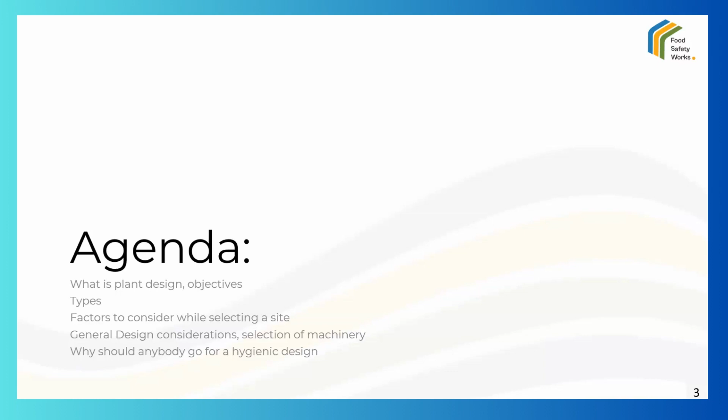And a little bit on general design considerations and basic factors you have to consider while selecting a type of machinery. And then we'll come to a conclusion on why everybody should go for a hygienic design. So these are the basic agenda points for today's session. First, we'll check what is a plant design.

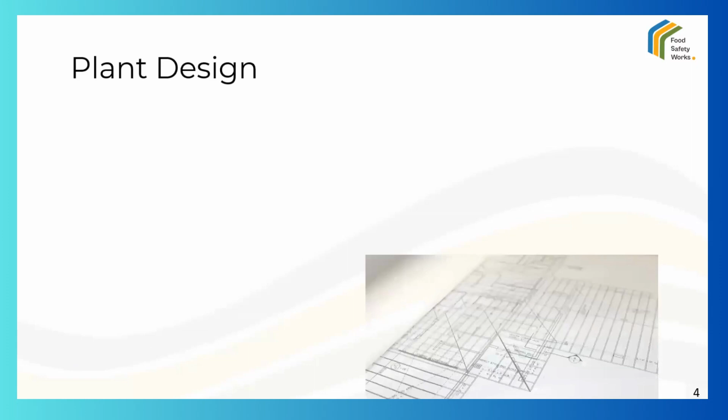Food plant design is basically a sequential and optimal arrangement of process, machinery, and movement of people. It refers both to the physical facility, that is your building and your supporting facilities, and to the enclosed process equipment, because in reality these cannot be easily separated. Unlike many other manufacturing situations in which the building is merely an enclosure for the equipment and the process, a food plant can be an integral part of the process and contributes significantly to its success or failure.

A food process design determines how the intended products in a plant are actually made. From this flow, the material and people patterns, utility requirements, environmental conditions, and all other requirements have to be determined in a facility design. So basically a plant design gives the space requirement for the facilities and their proper allocation.

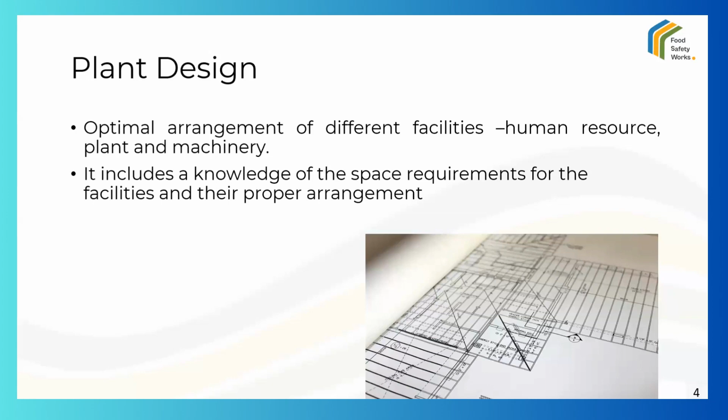Now, why do people spend so much effort on a plant layout? Let's quickly review some of the top reasons why people opt for a plant design in food business operations. Basically, it helps in overall simplification of your production process in terms of equipment utilization, minimizing delays in the process, reducing manufacturing time, and better provision for maintenance. Overall integration of man, material, machinery, supporting activities, and other considerations in a way that results in the best compromise. That is a major objective or advantage of having a plant design.

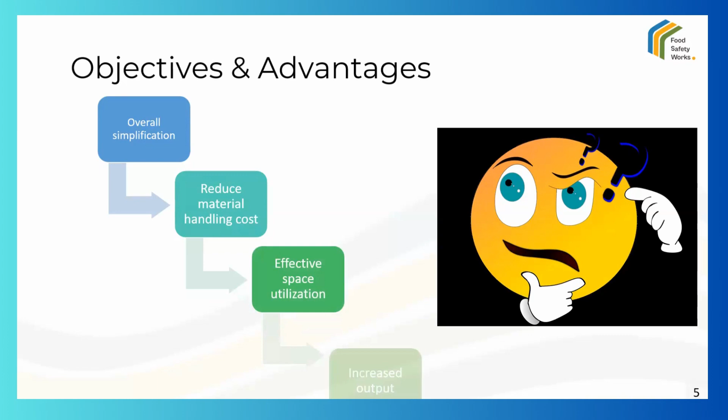And it helps in minimization of material handling by suitably placing the facilities in the best flow sequence, saving floor space, effective space utilization, and less congestion and confusion. It increases the output and reduces in-process inventories. Then it helps in better supervision and control.

It gives worker confidence, better convenience and better worker satisfaction, a better working environment, safety of the employees and reduced hazards, minimization of waste and higher productivity, avoiding unnecessary capital investments, and thereby higher flexibility and adaptability to changing conditions.

So in other words, you can say a good plant layout is specialized to what your business needs by achieving the goals of your operation and optimizing every possible parameter. So these are the general objectives and advantages of having a good plant hygienic design.

Now we'll talk a little bit about the types of plant design. Basically, you have a product or line layout, a process or function layout, a cellular or group layout, and a fixed position layout. Now, product or line layout: in this type of layout, only one type of product is produced in that particular given area or specified defined areas. The work centers are organized in the sequence of their appearance.

The raw material enters from one end of the line and goes from one operation to another rapidly with minimum work-in-progress storage and material handling. In this type of product layout, the equipment is arranged in the order of their appearance in the production process. So if you have a product layout, the advantages are reduction in material handling, less work in process, better utilization and specialization of your labor or workforce, reduced congestion and a smooth flow. It also gives effective and efficient supervision and control.

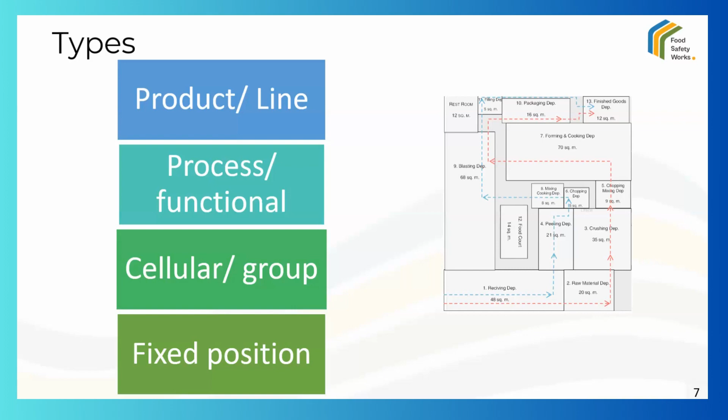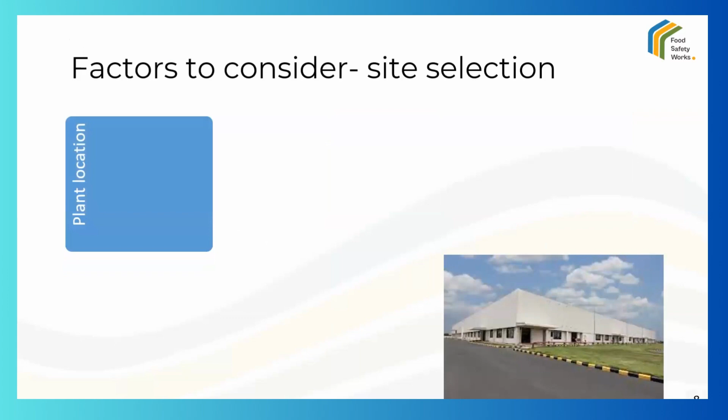So these are the general types of layout. In general, the food industry is mostly based on the product and the process layouts in general applications. Now, for a food establishment, we'll see what has to be considered when you go for a site selection. As per FSSAI, a food establishment has to be located away from potential sources of environmental contamination like objectionable odors, chemical pollutants or smoke, or anything which poses a serious threat to food safety. And you should define your boundaries. The site boundaries need to be clearly identified with access control.

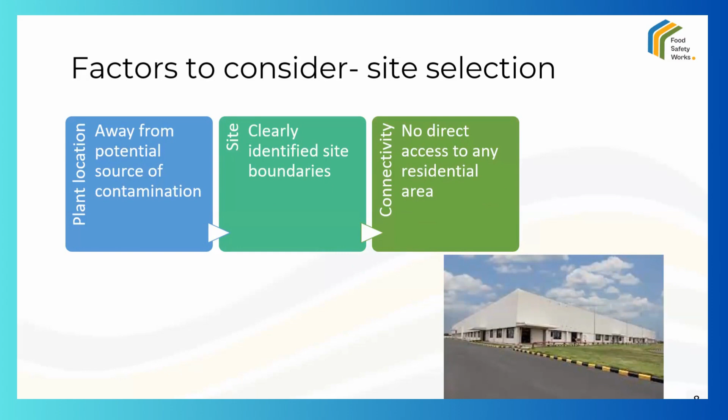The surrounding areas of the establishment have to be kept clean, maintained in good order, and adequately drained to minimize potential contamination from pests, water, debris, etc. The manufacturing facility shall not be directly accessible to a residential area. That is a requirement from FSSAI. Now, in certain cases, you cannot achieve that. In that case, sufficient measures have to be demonstrated to show that it is not posing any threat to food safety.

So once the plant size and capacity are decided, you will have to identify the process of making that particular product. Is my product going to be frozen by the IQF method, individual quick freezing, or a blast freezing method? That has to be identified.

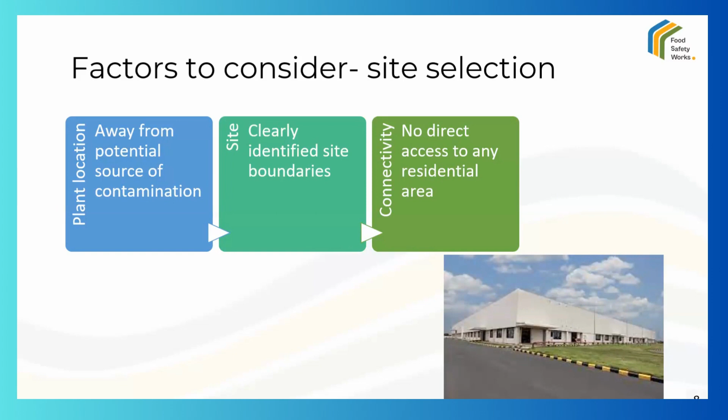Then comes your equipment selection and its capacity. You will have to do market studies, various designs, then come your utilities to support your services and your products, like your water supply, proper lighting, maintenance, and cleaning requirements. All of these come into the picture.

Once you have all of these identified, you have to consider the basics of design. That is, you need to have a segregated route or flow for people, raw material, packing material, finished products, and your in-progress material based on the process you have. It shouldn't possess any mode of cross contamination.

It is very important to ensure that there is a right flow of people and material inside the facilities, from the receipt of the material till the material gets dispatched. Is my flow causing any cross contamination or not? That has to be identified.

For example, generally for food handlers or staff who work in the food industry, you need to provide an adequate number of washroom facilities. Now, if the washroom facility opens directly into the production hall, there is a high chance of cross contamination. The airflow rate, people using the washroom without any change of PPE, all of these will affect the safety of the final product, however much we try to make the product safe.

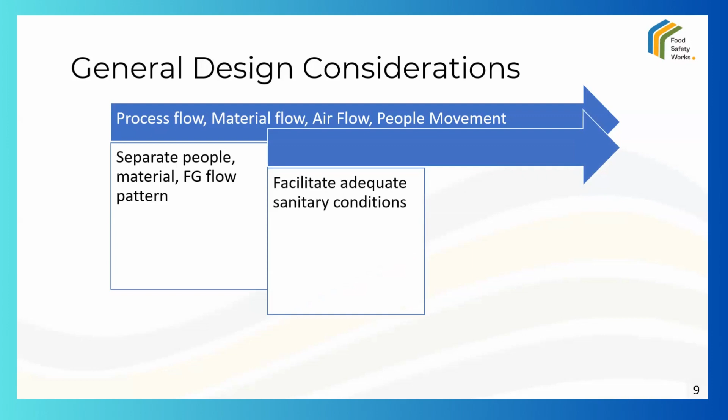So FSSAI says that there should be an adequate number of washroom facilities, but also says the food handling areas and the movement pattern of materials, products, and people shall protect against potential cross contamination between and during the operations of foodstuffs. That is a requirement which FSSAI states. Basically, your sanitary conditions and airflow rate have to be taken into consideration. You will have to focus mostly on your GMPs, which is good manufacturing practices.

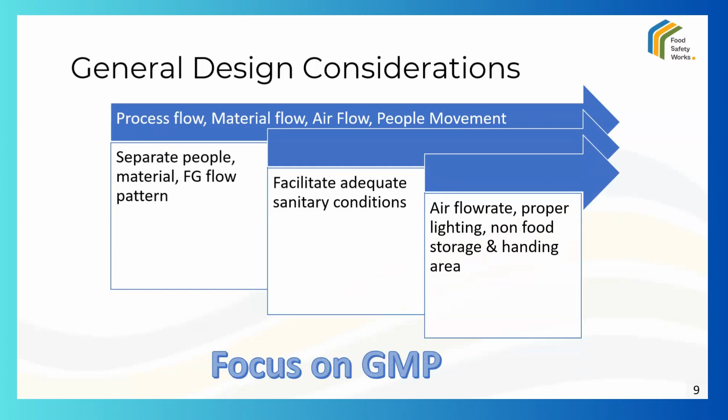Now, another example: in a kitchen unit or a catering unit, the food flow has to be in one single direction, unidirectional, from receiving to storing to pre-preparation, cooking, to the packaging, service, or dispatch of the product in that particular unit. It has to be a smooth flow. It shouldn't come back and then go into the next stage.

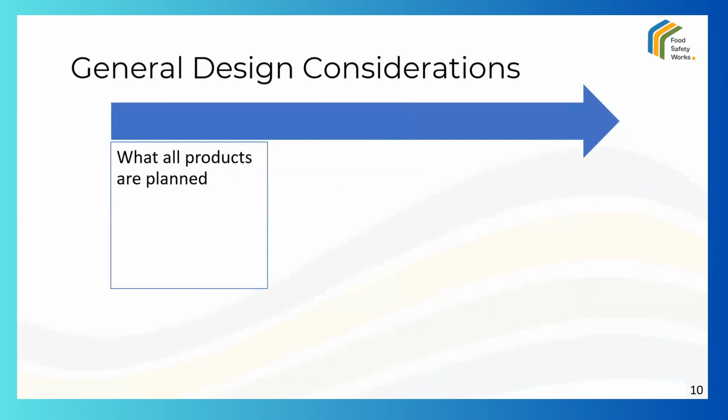You should understand the type of product that you are planning to produce. As I was mentioning earlier, whether it is a frozen, perishable, or canned product, you should understand that. Based on that, the support systems like your compressors and freezers, and the capacity of your freezers, have to be understood. And based on all of these considerations, you have to allocate the space.

Now, while allocating the space, you need to consider the available space as well. Based on that, you will have to modify the considerations based on the actual building. If your building is circular in shape, your space allocation has to happen accordingly. If you have calculated that your storeroom should have a certain length and width, you will have to modify that based on your actual building facility.

For example, a general consideration for a floor drain: it has to be screened to avoid a cockroach or a rat from entering the food premises. You can use sieves. Your ventilator openings, including the vents of the roof, should be screened to prevent the entry of any rat, insects, or birds. Gaps at the entrance of electrical conduits and process and utility piping, which are very convenient pathways for roof rats, have to be closed.

Another example may be piping. For the placement of piping, it should be installed at least 5 to 7 centimeters from the wall and floor to encourage thorough cleaning around it. Piping in the corners should be avoided as it hampers thorough cleaning. Process equipment shall be installed in such a way that enough spacing is provided to facilitate pipe cleaning. Pipelines penetrating through the walls, ceilings, or floors should be minimized, as holes in these areas can lead to sanitation problems and invite pests inside.

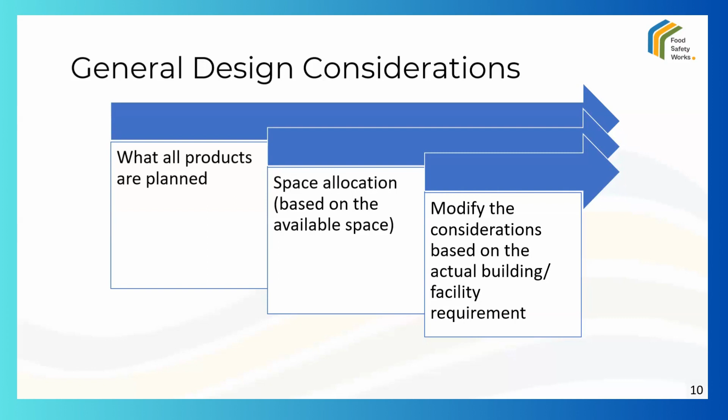Food processing supporting pipelines should be unidirectional, running from the cleanest area towards your least clean area. So now you will have to identify which are your high risk areas, your hygiene zones, your low risk areas, your intermediate. You can have a risk assessment done. Based on that, your drainage flow and pipeline flow have to be unidirectional so that they are not contaminating your process or your air.

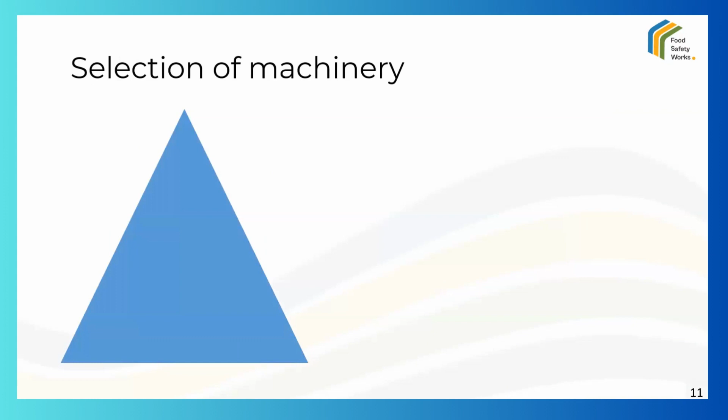These are the general basics you have to take into consideration while designing a premise. Now we'll see a little bit about selection of machinery. The fundamental reason for hygienic design of the equipment is to prevent contamination of food products. It is not just the air, but also your equipment, right? So material of construction is the major factor.

The equipment should be inert in nature, inert to the chemicals or the detergents you use for cleaning. It should be corrosion resistant. It should not have any toxic effect on the food or the material which passes through. It has to be mechanically stable. The surface finish should not be adversely affected by any cause. That is why stainless steel comes into the picture. Stainless steel is the most preferred metallic material, but the alloy depends on its application based on the food and the process. Somewhere you can see plastics.

Some plastics have an advantage over stainless steel, such as lower cost and lower weight. Wear resistance is there, better chemical resistance is there. Some plastics may be labelled as stable at freezer temperature or dishwasher safe, because most plastics perform differently at minus degrees than they do at +20 or +35°C. These are indications for the customers about the make and the intended use of the particular equipment or tool.

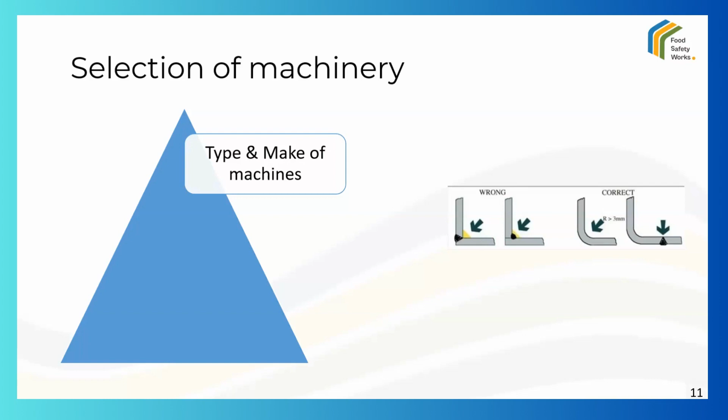Then comes your material of construction. It should resist cracking, abrasion, flaking or chipping. The equipment must ensure that the functional openings are sealed with covers and respective caps, and that an effective preventive maintenance program is in place. For example, aluminum, bronze, zinc or galvanized steel have poor resistance to certain cleaning detergents or acidic foods, and they have to be avoided in your food contact areas.

Next comes your design factors. In some cases, you may come across a table or a food pan with sharp corners, dead ends, gaps and crevices. It should be designed to prevent any areas where microorganisms can grow or harbor. All these machineries should be designed to avoid any opening where they can enter, multiply or harbor, such as enclosures with openings that are not accessible for cleaning, like certain parts of your grinders or roasters.

If it is difficult for a person to clean, then there is a high chance pests can go and harbor. In some machineries, housekeeping staff or food handlers may complain that a corner is not easy to clean or they cannot reach the cleaning tool to the corners. Thereby, these equipments cannot be cleaned properly, which leads to contamination issues. It should also seal up your condensation issues.

A good design makes the equipment easy to clean. This has to be kept in mind and put into action while selecting machinery or equipment. By doing this, you will most likely increase the life of the equipment and reduce your maintenance and operational cost.

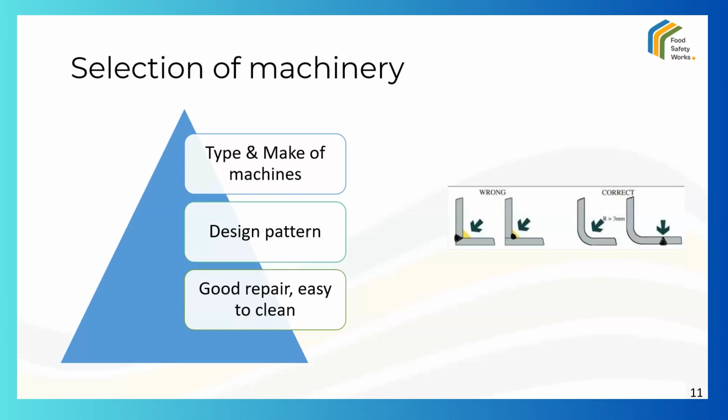It should also eliminate components that may loosen, break off or fall into your food products. There are many makes in the market where, after many uses, because of wear and tear and the friction that arises during cleaning, certain parts of the machinery start coming out. So this shouldn't happen when selecting machinery.

A good plant design specifies the equipment that has to be used and the performance requirement for the equipment. It also gives the interconnection of your raw materials, people flow and materials as per your process or production methods. It also gives the placement of equipment, storage spaces, facilities, how your delivery and unloading has to happen, how it has to be elevated so that your vehicle sits properly, so that there is no gap between your vehicle and your loading space.

Required instrumentation or controls. It also gives process monitoring and control interconnections, utility and your waste treatment requirements. These are the general requirements which a hygienic design gives.

Now, plant design situations may arise in multiple areas, for multiple reasons, at multiple facilities. If you want to go for an expansion of your current unit or change your existing plant capacity, then plant design comes into the picture. Or because of certain restrictions of a poor site, or if you want to add or replace some machinery or new products in your existing range, then your hygienic design requirement comes in again.

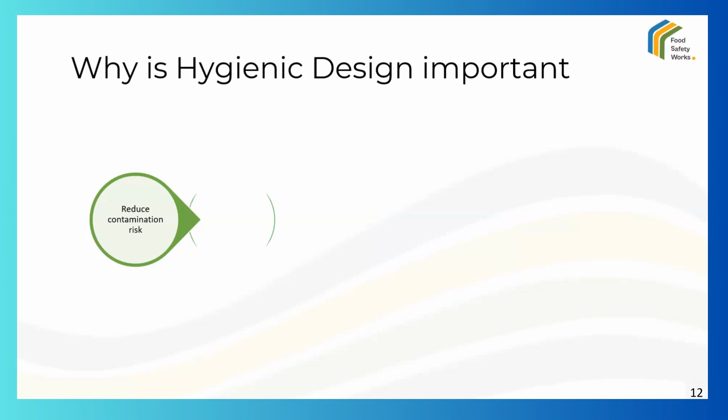Now, why is hygienic design important? It helps to reduce the contamination risk inherent in food processing. Food manufacturing and processing units should ensure their products are free from all types of food safety hazards, basically physical, chemical, biological and allergenic contamination. Inadequate hygienic design can intensify food safety risk by increasing the likelihood that processing equipment itself becomes a vector for food cross contamination.

Around the world, regulatory authorities and program owners incorporate hygienic design as a best practice into the standards for fabrication, installation, maintenance, and cleanability of food processing equipment. In order to comply with food safety or to get certified with third-party food safety standards, food manufacturers must inevitably adhere to the practices of hygienic design.

To help this, there are American sanitarians, the European Hygienic Engineering and Design Group, 3-A SSI, which is 3-A Sanitary Standards Incorporated, and NSF. These are organizations which promote guidelines for hygienic design. GFSI recognized standards like FSSC, BRCGS, SQF, etc. worldwide have a robust set of benchmarking requirements for hygienic design of machines and equipment, making the overall operation safer and more manageable for staff.

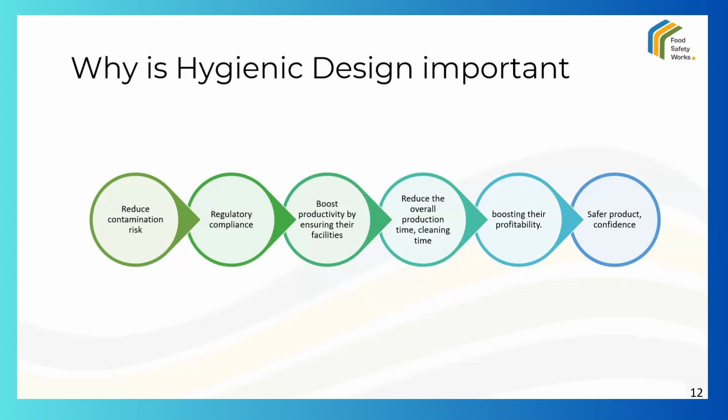By having all of these, your equipment works well, reducing breakdowns, reducing overall production time and cleaning time, and it helps profitability, builds confidence, gives a safer product, and helps clients get safer products to customers. So these are the reasons why anybody should have a hygienic design in place. Here we come to the end of the session, concluding that food safety is everybody's business.